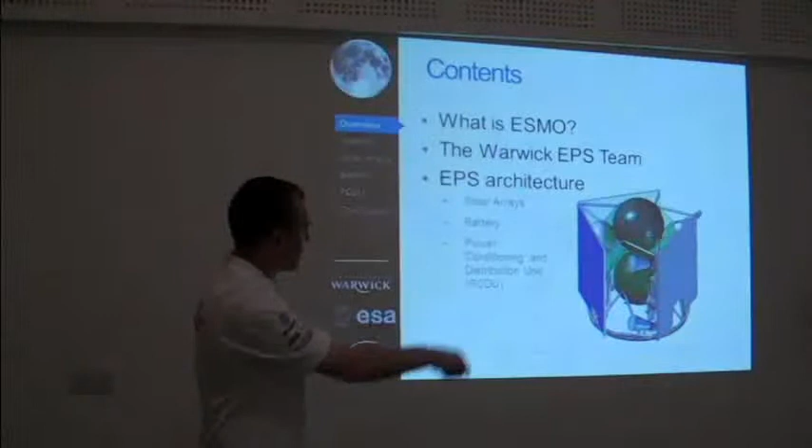So, our part of the satellite is the EPS, or the electrical power system. So we've got these solar panels here. We've got the battery, which you can't quite see on this picture, and we've also got the central power conditioning and distribution unit, which is right back there. We're going into quite some detail into these elements, so we'll try and keep it interesting, but it'll be quite technical as well, so try and follow along.

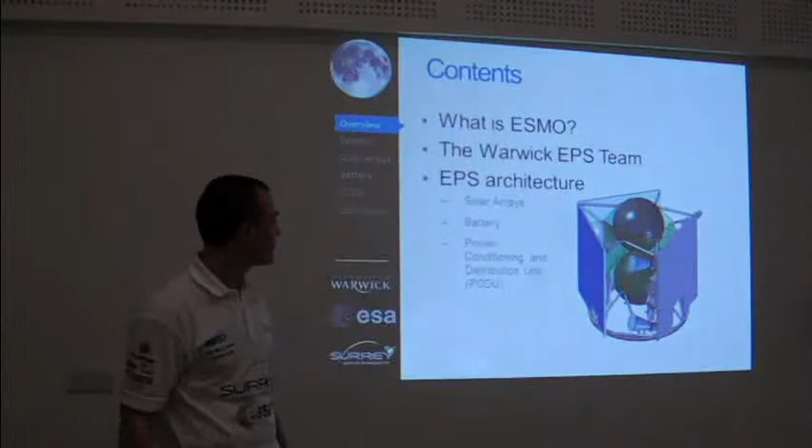So this project was initiated by ESA back in 2006. As I already mentioned, 23 student teams, and the projected launch date is going to be 2014, according to the current schedule. Now, it's been managed by SSTL, Surrey Satellite Technology, since 2009. So we've essentially been running to a set of milestones set by them since 2009.

Just to briefly outline the roles of our team, we have 5 mechanical members and 4 electrical members. We have Mark, James, Will and Andre, who work on the electrical parts of the EPS, and we have Felicity, Louise, Adam, myself, and Ollie, who work on the mechanical elements. We also have non-technical roles, which include finance, health and safety, sponsorship, publicity, and inter-team communication management.

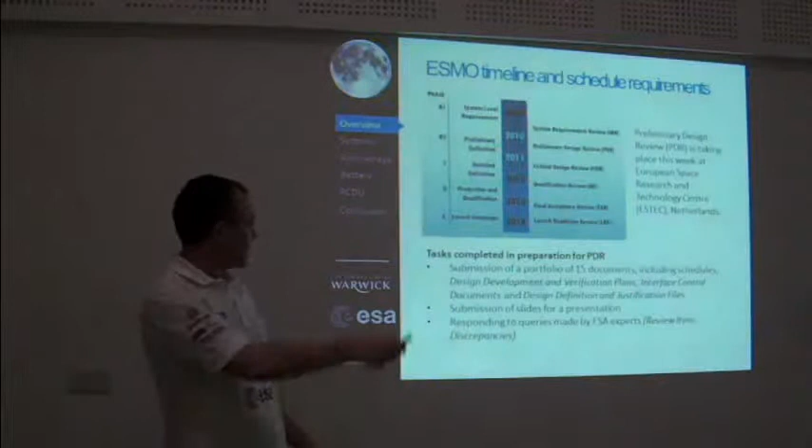So, the milestones of the project are set out as follows. We're currently in the PDR phase, and currently they're holding what's called the PDR co-location meeting, which is where they take all of the documentation we provided for them, all the documentation that other teams provided for them, get together in a big room and discuss it and find out whether we can actually proceed as planned, which is what we hope is going to happen.

Just to give you a brief overview into the financial side of the project, it's quite a low budget project, as you may have gathered. But we are accumulating money throughout the years as we go, because we know that in the prototyping stage of the project and in future years, teams will need a larger budget in order to produce components, real space-grade components, in addition to the sponsorship that we get.

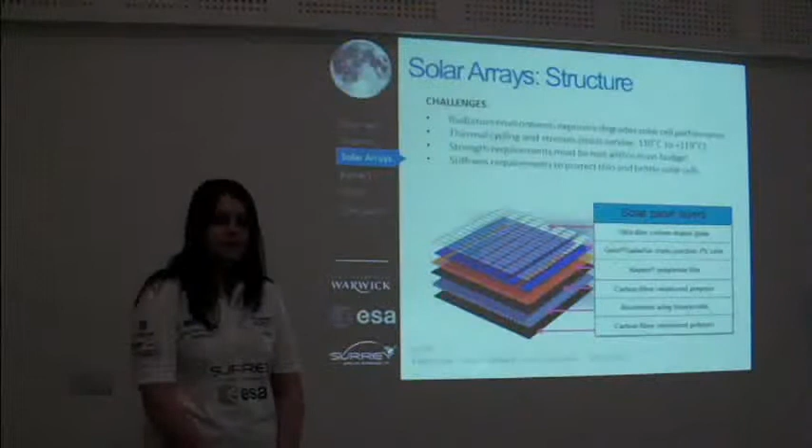ESMO will be powered by 2 body-mounted solar arrays positioned at a 90-degree angle to each other. The EPS team has several challenges to face in terms of the mechanical design of the solar arrays. We must consider thermal cycling as the satellite enters and leaves an eclipse. Secondly, the arrays will be bombarded by high-energy radiation and damaging charged particles from the sun and space. Finally, the arrays are vulnerable to high stresses as a result of vibration during launch and deployment.

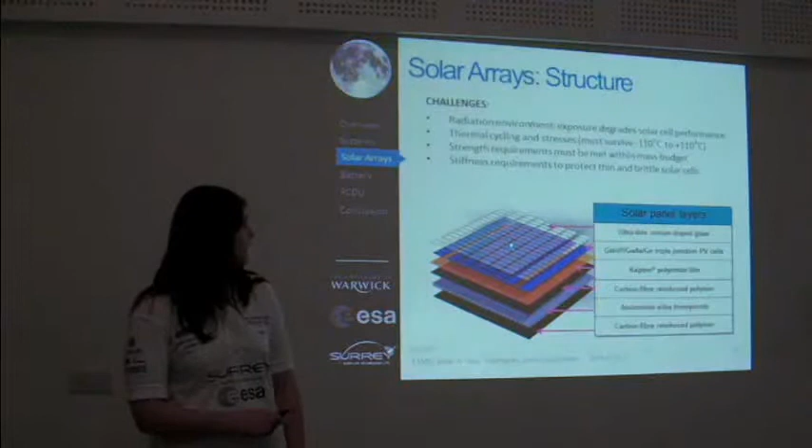In light of these challenges, the design as it stands is represented by the layered figure on the screen. The mechanical strength is given by the solar panel substrate, which consists of a layer of aluminium honeycomb sandwiched between 2 layers of carbon fibre reinforced polymer. The aluminium honeycomb is suitable as it is light whilst having a high specific stiffness in this direction. The sandwich effect provides resistance to bending, and a layer of polyimide film, shown here, is necessary for providing electrical insulation between the solar cells and the carbon fibres. The solar cell assembly, represented by the top 2 layers, will now be discussed by Louise.

ESMO will be powered by triple junction solar cells, which have a nominal efficiency of 28%. This is significantly better than the standard silicon solar cells, which typically achieve 15% efficiency. Solar cells produce power over a range of voltages and currents, as shown by this plot, which is the IV, or current voltage curve, for the cell that ESMO will use.

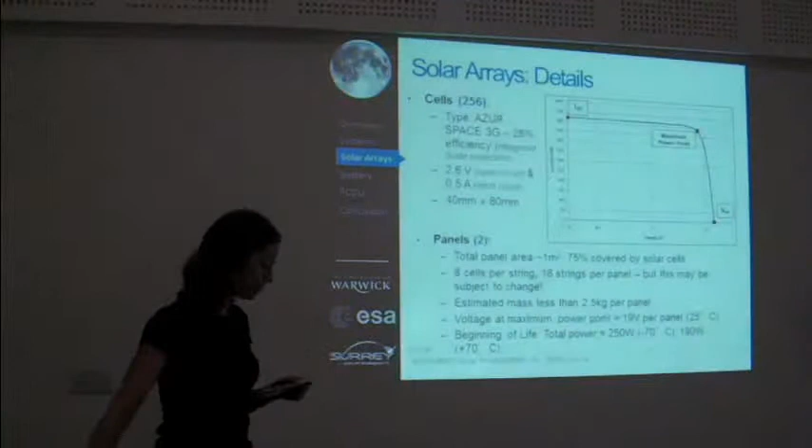The extremes of the graph are the short circuit current in the top left and the open circuit voltage in the bottom right. Between these two, there is a point of maximum power output, power being the product of current and voltage. Below the maximum power point voltage, the cell operates at an approximately constant current. Above the maximum power point, the current drops off sharply to zero.

256 of these cells will be arranged over 2 panels with a total area of about 1 metre squared. They'll be connected as 16 strings, each string having 8 cells in series. This configuration will produce about 19 volts at the maximum power point, although this is dependent on temperature and the age of the solar cells. The power produced will similarly range from 190 watts to 250 watts over the temperature range over which the cells are expected to operate.

This graph shows the variation in power output, voltage and efficiency over the temperature range of the cells. This is one reason why it's necessary to produce a thermal model of the solar cell's behaviour. The second reason is that changes in temperature will induce stress cycles in the solar panel substrate, which could lead to fatigue damage over the life of the solar panels.

3 main types of heat transfer were considered in the modelling process. Solar radiation, radiative exchange between the panels and the rest of the spacecraft and between the panels and space itself, and conduction through fixing bolts and electrical connections. In order to model these processes, 3 different approaches were used.

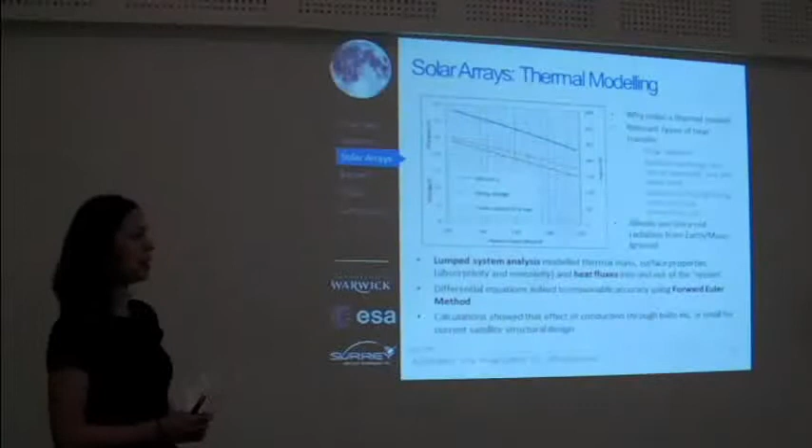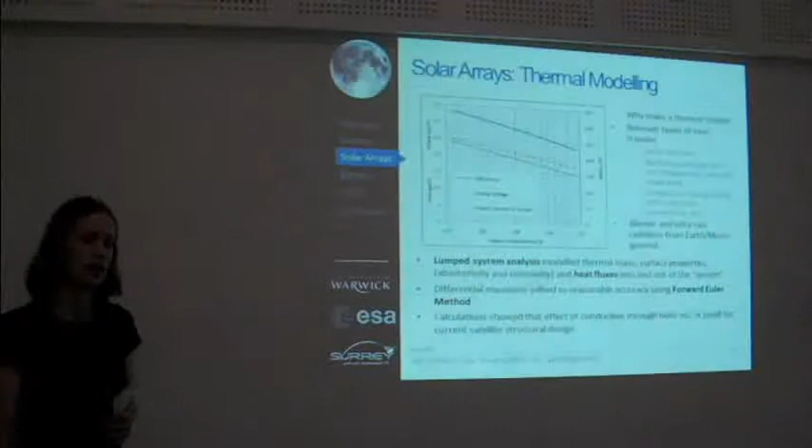The first was a lumped system analysis, which considered the panel as a homogeneous thermal mass covered in a skin with surface properties of absorptivity and emissivity. An energy balance led to a differential equation which was solved using a forward Euler method, and calculations showed that the effect of conduction through the bolts to and from the rest of the satellite is small.

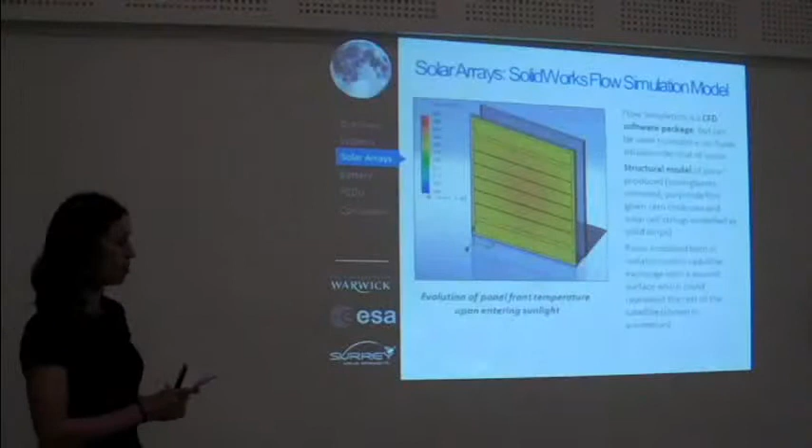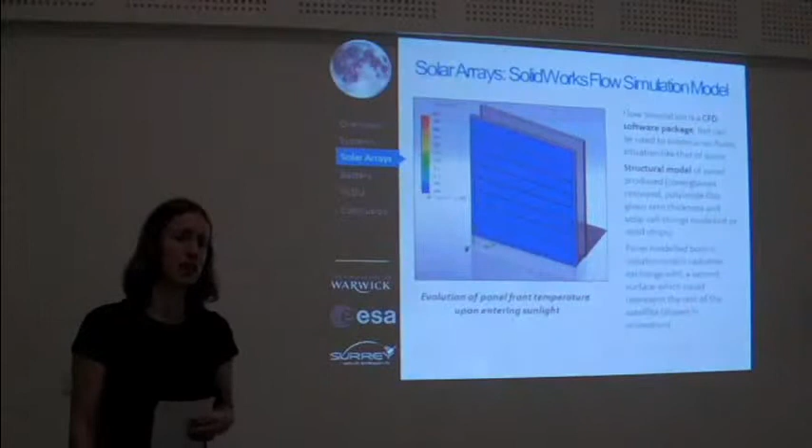In order to validate this initial model, the thermal behaviour of the panels was simulated using a CFD program, SolidWorks Flow Simulation, which has the capability to model radiation and conduction-only situations like those of space. A structural model was produced by simplifying various aspects of the panel geometry.

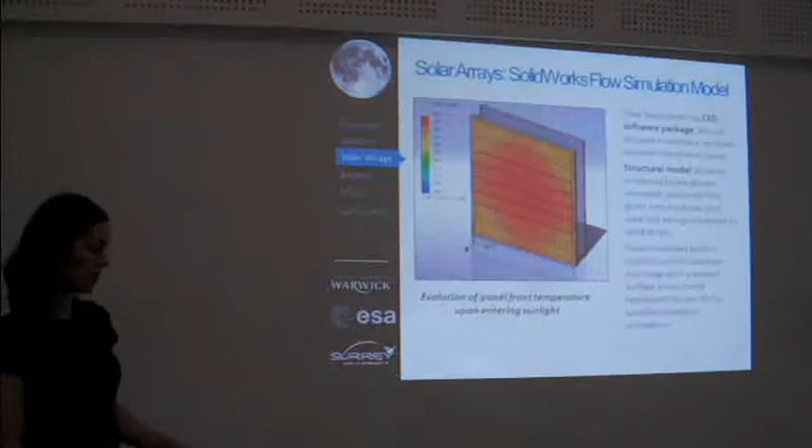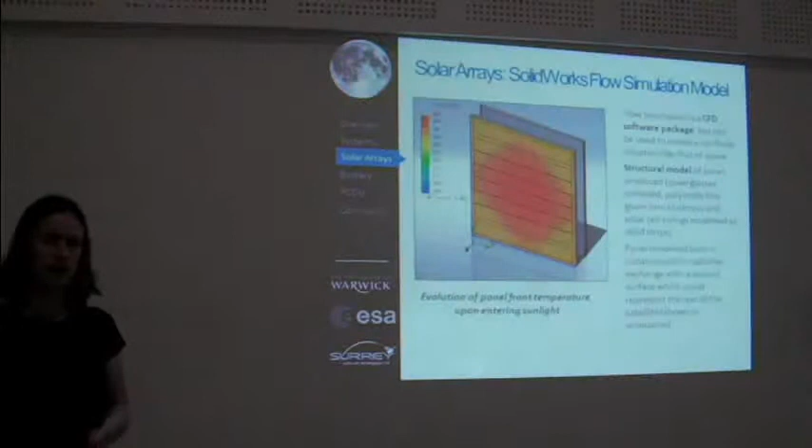The panel was then modelled in isolation and in radiative exchange with a second surface, which was going to represent the rest of the satellite, shown by the grey plate in the animation. Because the structure of the rest of the satellite is not yet known in any great detail, this simplification was the best we could do for the moment. I'll now hand over to Felicity, who will explain the third model.

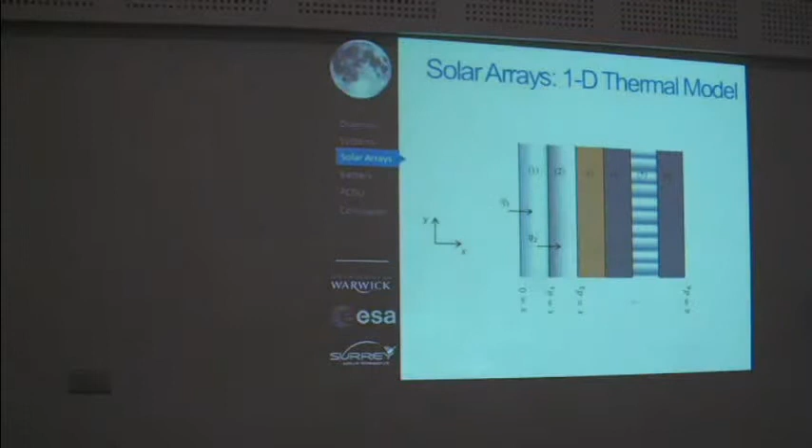As solar radiation is incident on the front of the panel, the absorbed heat flux is constant over the surface, meaning that heat is dissipated through the layers and conduction is approximately one-dimensional. Based on this reasoning, a 1D thermal model was developed and solved using a Fortran 90 program. The image on the screen shows an expanded view of the layers within the panel.

Within the layers, the heat equation was solved, and on the surfaces and between the layers, various boundary conditions were applied. Q1 and Q2 represent the heat flux absorbed by the cover glasses and the solar cells, respectively. Without going into detail, the model was solved using the forward time centered space method, meaning that a forward Euler method was used for the time derivatives and the spatial derivatives were approximated using central differences.

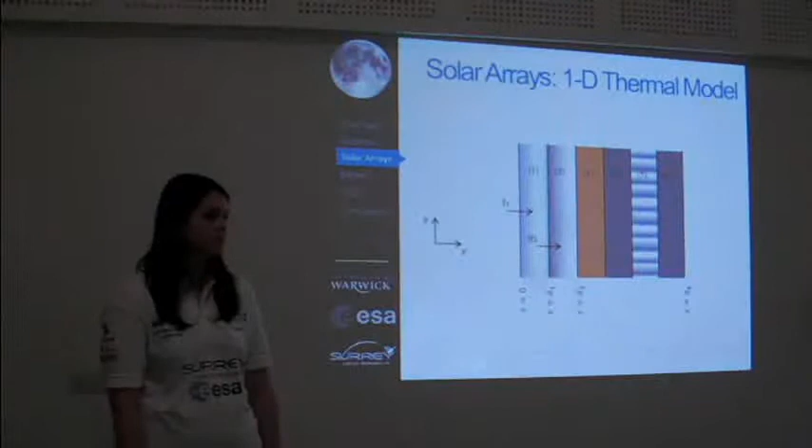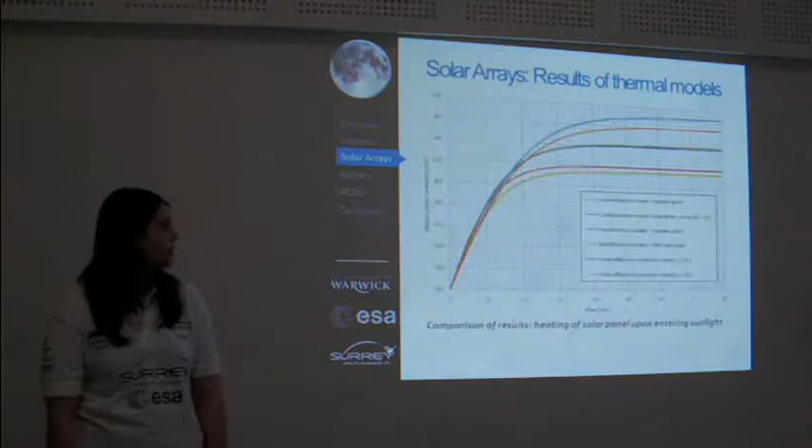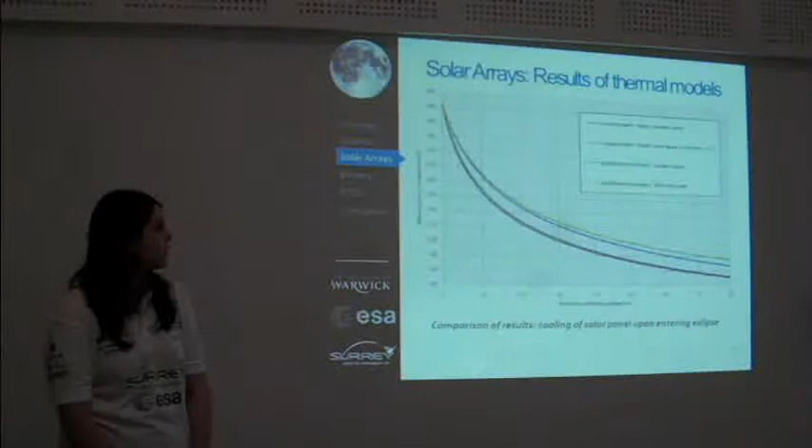The SolidWorks model and the lumped model were improved by considering the effect of the rest of the structure by incorporating a backplate and a view factor respectively. A similar graph shows a solar panel cooling down on entering an eclipse, and as you can see there is good agreement between the results of different modelling methodologies. I will now hand over to Mark to talk about the battery. Thank you.

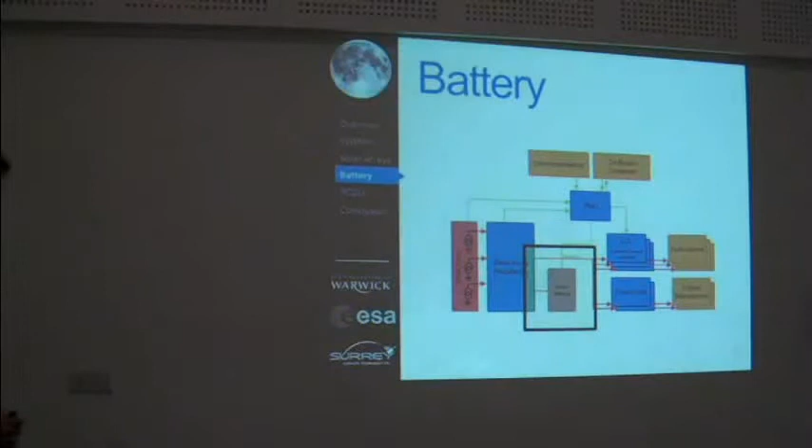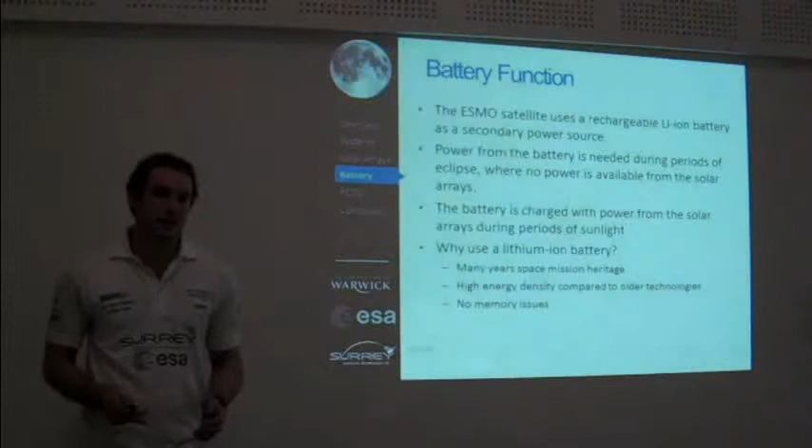So we've seen that in sunlight the satellite is given power by the solar arrays. However, in periods of eclipse, there needs to be a secondary power source, and this is a lithium-ion battery. Now, we use a lithium-ion battery because it has very good space heritage, shown there. It also has a high energy density compared to older technologies, which means that for the same size battery you get more power, or you can have a smaller battery to get the same amount of power. It also has no memory issues, which means that you don't have to discharge it every now and again to keep its full capacity.

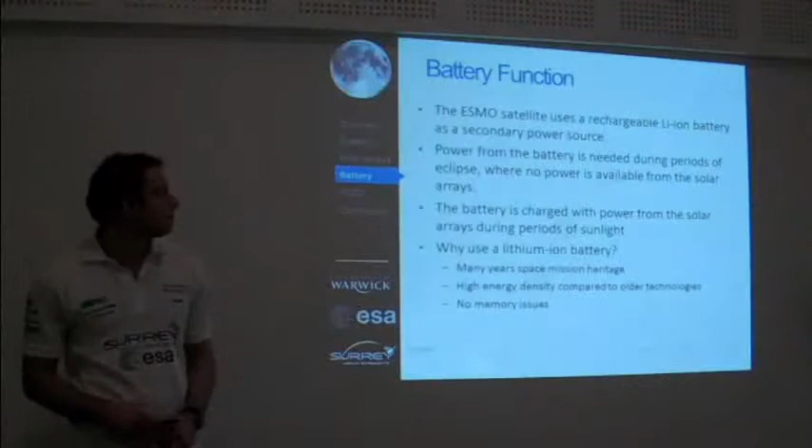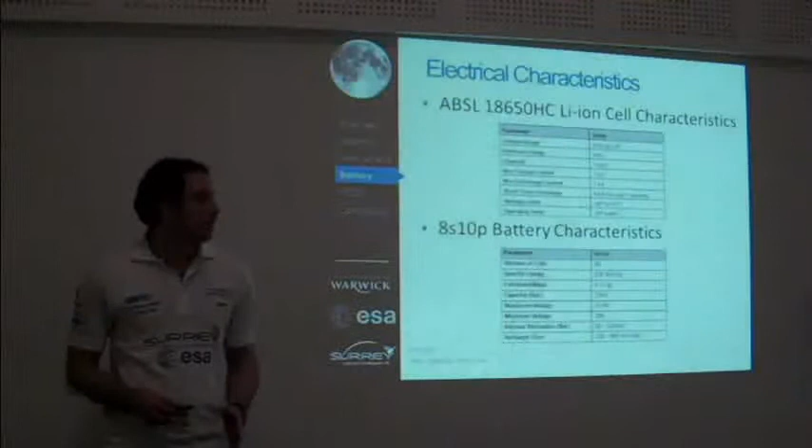The cells we'll be using are the ABSL 18650 lithium-ion HC cells. The important parameters are listed in this table here. The ones to notice are the voltage range, 2.5 volts to 4.2 volts, which you must stay within. The capacity of 1.5 amp hours, which means that the cell can deliver 1.5 amps to a load for an hour. And also the maximum charge current and discharge current, as well as the temperature limitations.

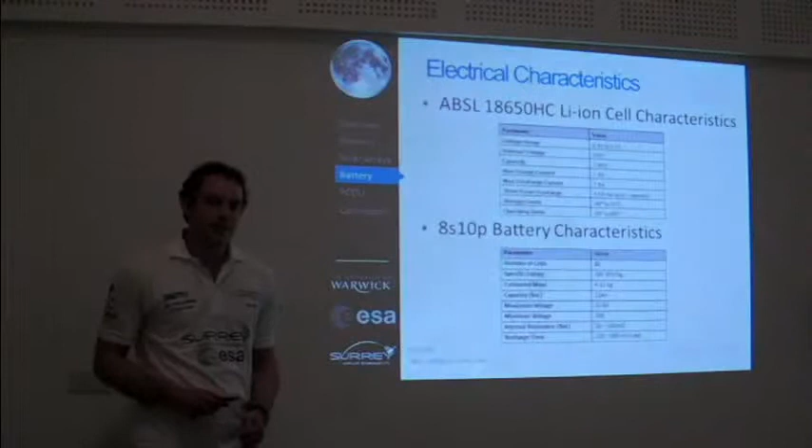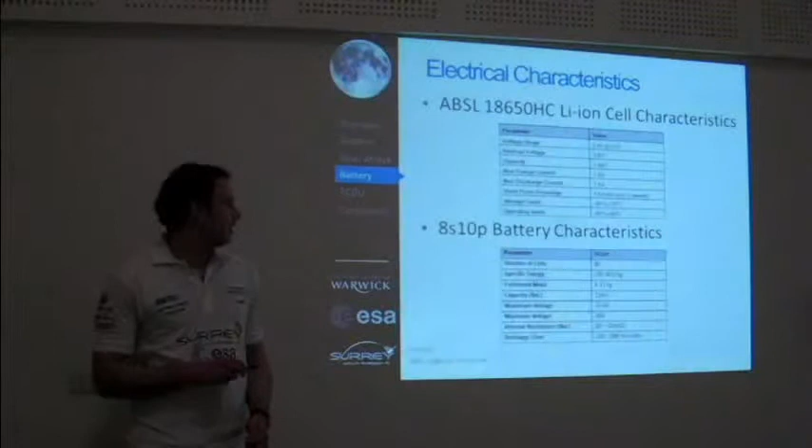The battery will be made up of 80 of these cells, arranged in an 8S10P configuration, which means that there's going to be 10 parallel strings of 8 cells each. And from the cell characteristics you can extrapolate the battery characteristics. Again, the important ones to notice are the maximum voltage and the minimum voltage. You must stay within this range. The capacity is now 15 amp hours, which determines how much power the satellite can use during eclipse.

When using a lithium-ion battery in a power system, you need to make sure you do the battery management correctly. The most important being, you must not overcharge the battery. If you do, you'll permanently damage the battery and it can possibly explode, especially at high temperatures. Also, you mustn't discharge the battery below its minimum voltage, which will also damage the battery.

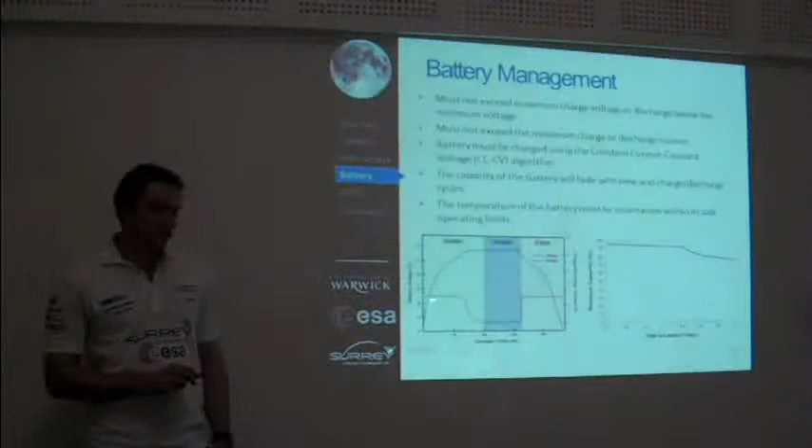To make sure you don't overcharge the battery, use the constant current, constant voltage charge algorithm, which is shown here. The constant current phase, to begin with, charges the battery at a constant current until the battery reaches its maximum charge voltage. You then begin to ramp down the current whilst keeping the charge voltage at its maximum, thus you don't overcharge the battery.

Another thing to consider is capacity fade. When you start to charge and discharge a lithium-ion battery, its capacity will fade from its maximum, as shown by this graph here. This shows the testing period and the actual mission itself lasting around about a year. From this graph, we can see that the battery fades by about 22%, leaving 11.7 amp hours of capacity at the end of life. If you factor in a string failure, this will mean that the end of life capacity is 10 amp hours, which is considerably less than we started with.

To make sure that we can actually deliver the amount of power that the satellite needs during eclipse, we've decided to make a simulation model of the battery. I'll now hand over to Andre, who will discuss the simulation model.

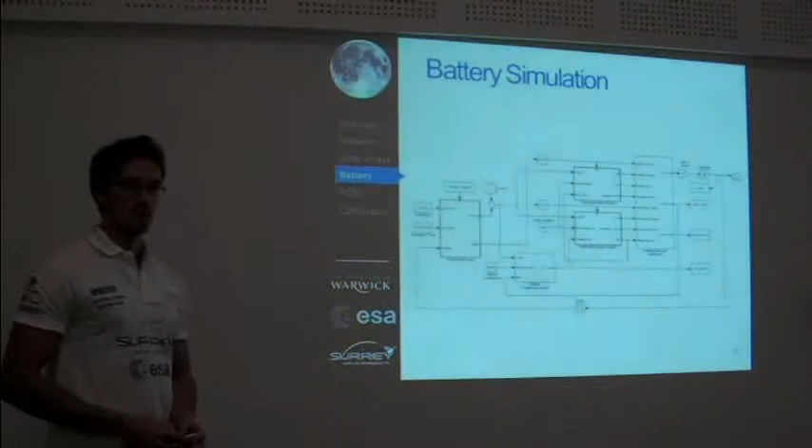Well, SSTL have provided us with the mission's power profiles and has suggested that an 8S10P battery model should be used for our mission. In order to verify this, the EPS team have created a battery simulation model using MATLAB and Simulink. The MATLAB Simulink model is shown here, where the three main components are the charging battery model, discharging battery model, and the thermal model. The model generates typical data for the ABSL 18650 lithium-ion cell, which is used for the battery pack.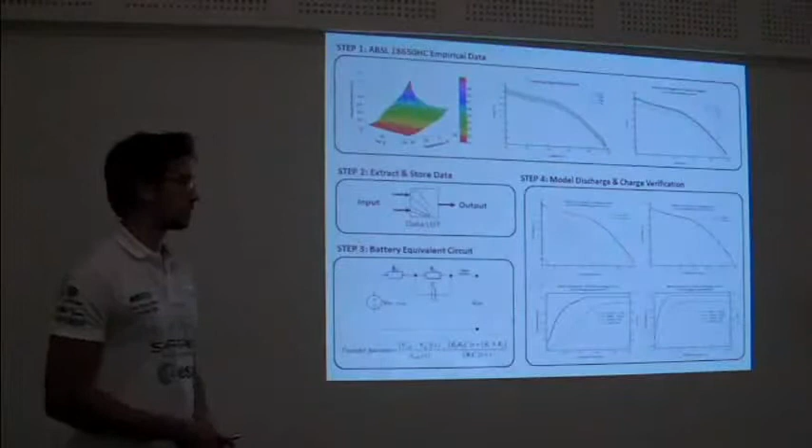The final step in the battery model is to validate it. And in order to validate it, we have used BEAST, which stands for Battery Electrical Analysis Software Tool, which is used by ABSL and was developed by ABSL in order to generate empirical data for this typical lithium-ion cell. We can see that BEAST shown in blue and the Simulink model shown in red are similar.

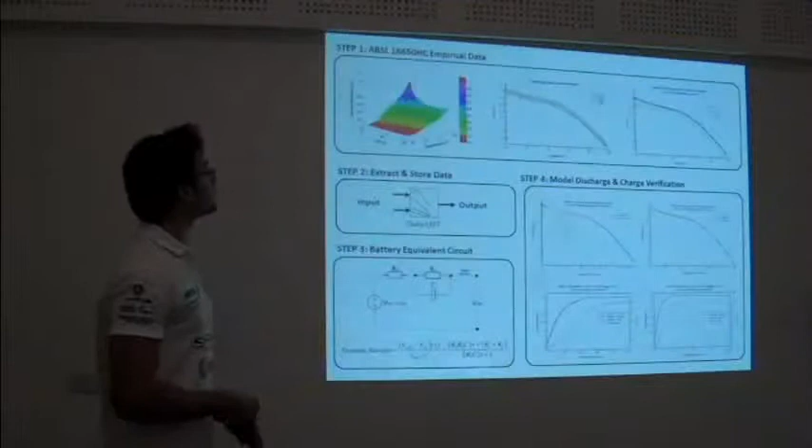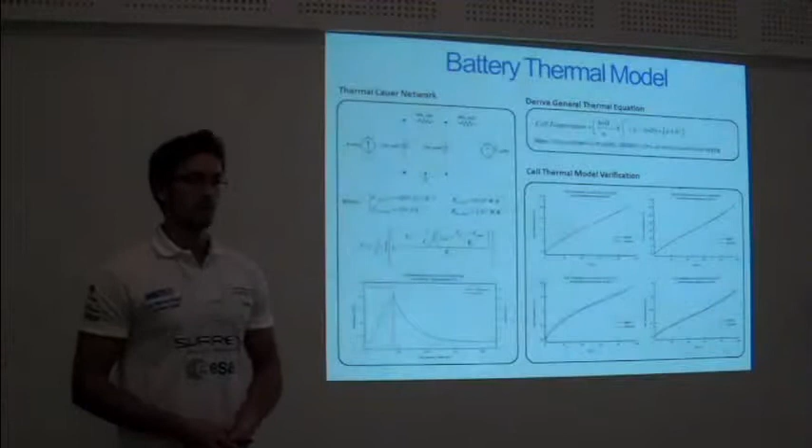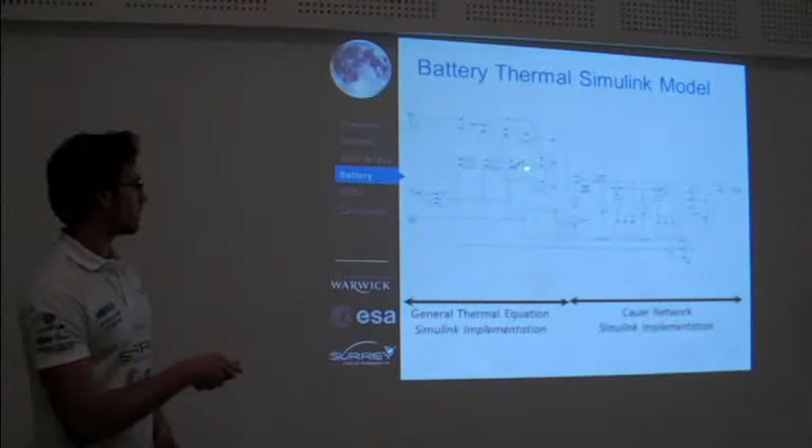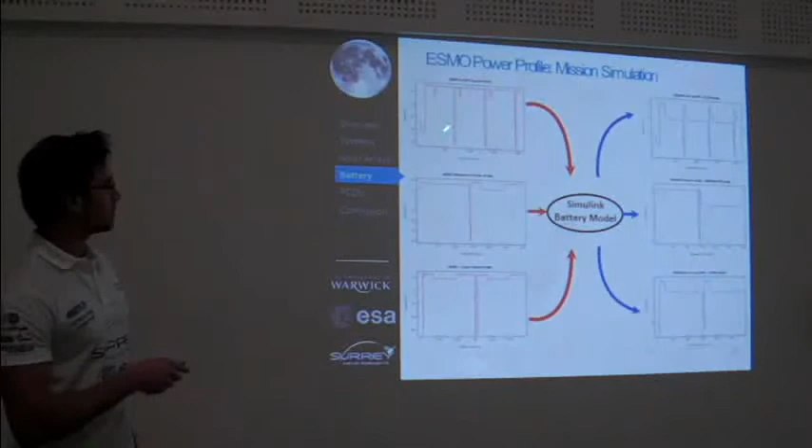Here we're showing how you would implement a circuit model in Simulink, and a general equation with 3 lookup tables here containing the key values stored in the Simulink lookup tables. These are the three power profiles provided by SSTL. We then insert each power profile into our Simulink